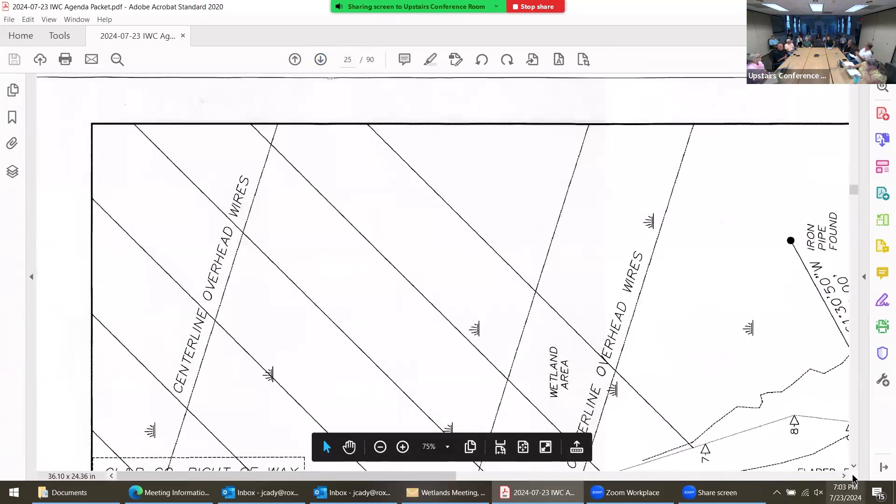All right. If you remember the last meeting, we had some questions for the engineer. Chris suggested moving the driveway in front of the septic, and I notice on this new drawing that the proposed driveway has been moved, so it's not so steep, and water doesn't go screaming down it right into the wetlands, which is, as I said before, a very large swamp up by the high school.

Okay, yeah, we moved the driveway and we also put wood chips in the front to stabilize that hillside for construction, if you see along the front. We moved the pool back 50 feet. And we also put a gallery, a 24-inch gallery, for the backwash of the pool. And I think that was really your concerns at that point. So we just kind of changed a little bit and did change what your concerns were.

Okay. Anybody have any questions, concerns? You moved the pool back, but how about the pool equipment? Yep, it's behind it. If you look, there's a little square, that's where the pool equipment will be.

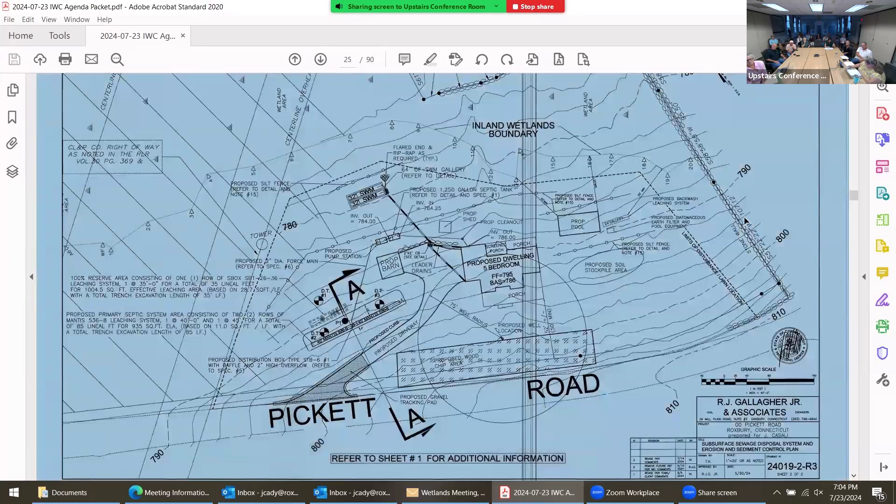And what's the grade on the driveway now? From what to what with the improvement, if you did change it? Which one? Right here, so it goes from 810 to 7. So it goes back to... Sorry, I don't really know right off the top of my head. I'm sorry about that. Well, that's okay.

I mean, it looks like it's an 8 foot, by counting contours, 8 feet of drop, probably 150 feet of run. Should look at that, sorry. That's like a 6% grade, if that's what it is. It's a lot better than it was. It was, I did. All right, any other?

No, John? I'm good. Kathy? Not for me. Sue? No, I'm good. So I'll look for a motion. I'll move to approve this as a regulated activity. Second. Any discussion? All in favor? Aye. Aye.

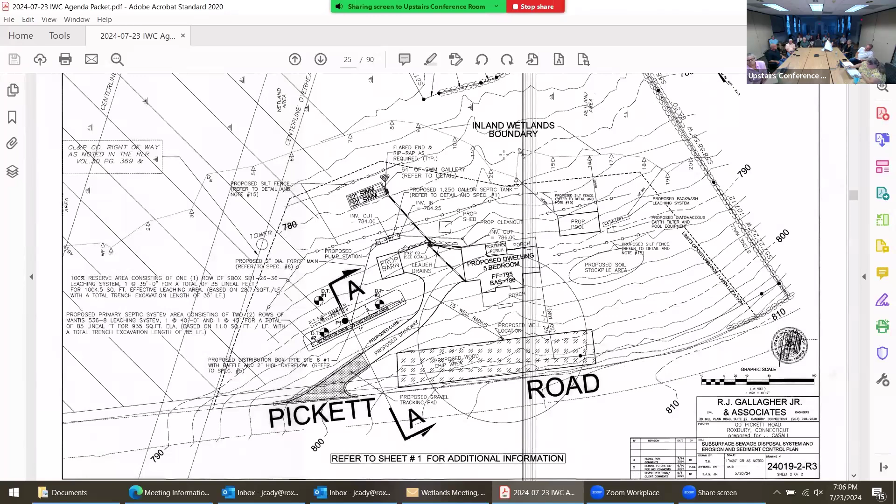Thank you, Heather. Thank you. Thanks for listening to our input. Thank you so much, I appreciate it. Thank you. Have a good night.

124 Weller's Bridge. Okay, we did some site walks here. We have a new map.

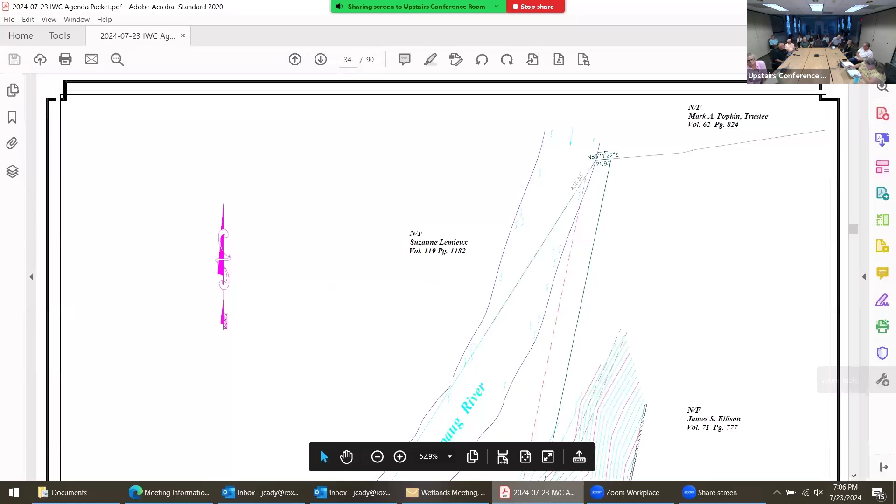Hi, Brian. Russ, how are you? Good, good. The house going okay? So far, so good. Good.

Yeah, that's the survey map right there of the entire property. Do you want to state your name for the record? I'm Brian Neff, licensed engineer. So I drew up the septic system plan, which is the other plan that's included, I believe. Here we go. I brought some paper copies also, if that's any easier to read. Yeah, sometimes it is. A little tiring squinting at the screen sometimes.

Okay, Kathy did the site walk with John. I did the site walk with Chris. Unfortunately, Chris told me after the site walk he wasn't going to be here, so I asked him to send Julie his observations. You want to read that, Julie? Yep, I can read it out loud.

So on 124 Weller's Bridge Road, his observations were: after visiting the property, his primary concern is the potential for erosion and runoff at the site once the stumps are pulled and the excavation begins. Because of its location, proximity to the river, and extreme slope, I cannot stress enough the importance of having multiple layers of protection, and that they be monitored and reinforced regularly. The one saving grace is the natural table point downslope where the energy and sediments could be captured. So if that information could be provided with calculations, he would appreciate it.

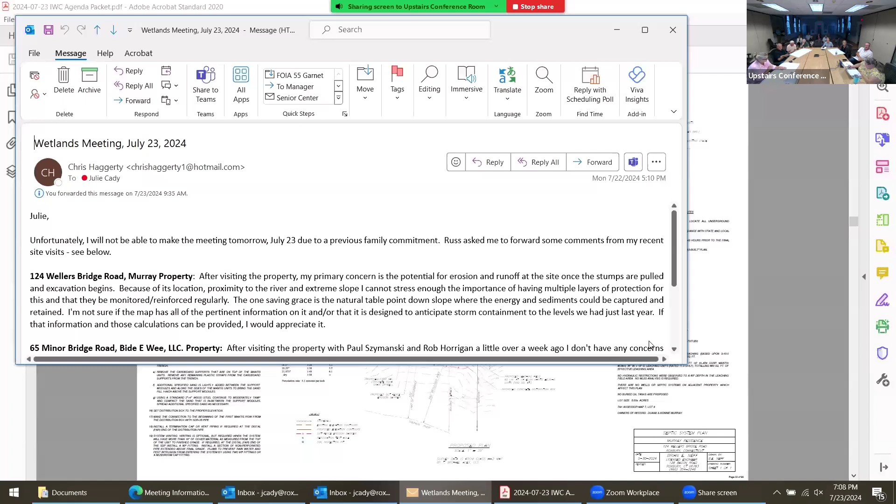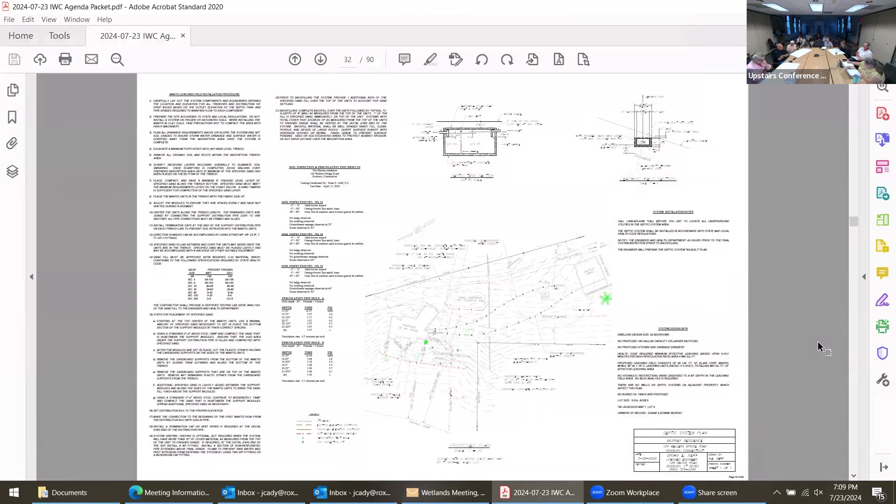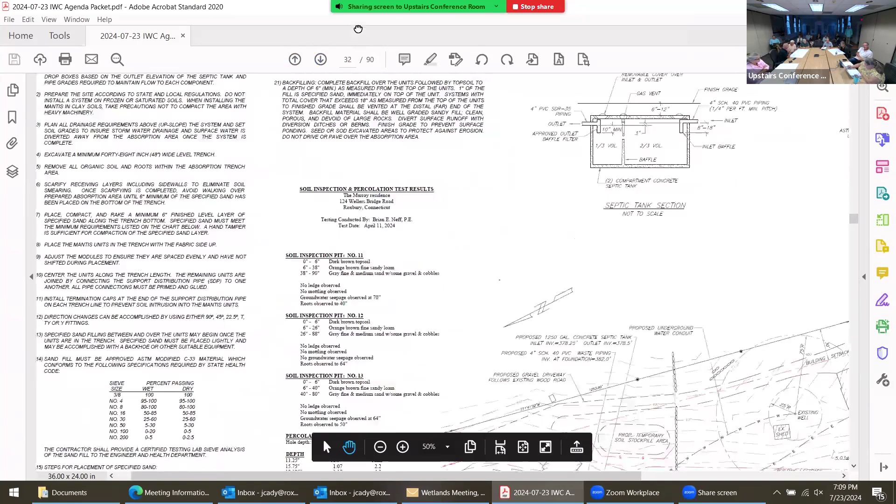So in general, to go over the house site itself, the floor perimeter is a little over 2,000 square feet. It's a 2-story house, so it's relatively compact on the site. I've got some silt fence shown down below the house site and septic area, where it kind of flattens out at the lower level, so that reduces the velocity of water coming down the hill. The actual disturbance area is probably in the range of 5,000 square feet. You've got some perimeter around the house, but it's a fairly small yard area on the sides and down below.

We do have an infiltration dry well down below the house for roof drainage. The soils there are very good. We had percolation rates of 6 minutes per inch for both the primary and reserve septic areas. It's a lot of sand and gravel, so we have excellent drainage in terms of subsurface conditions. And you can see the roof drain pipes going down into that dry well, which is in the lesser slope area below the house.

We've got a 100-foot limited disturbance that's just below the silt fence line, so there's minimum disturbance within that 100 feet. We just basically have the silt fence going in there. The septic system's off to the side, which is a gravity flow system. So the owners have made an effort to keep this as compact as possible, and that limits the disturbance area overall.

On my site walk, I have concerns about the drainage on the driveway, that there's none shown. I did see erosion where water's, even though it's a flat driveway, I saw water heading down the hill. Or some water that comes from the hill above goes across the driveway. Right. So there is some sheet flow. Is the driveway installed? It's an old wood road. Yeah, it's gravelled, but it's not really finished. So it's been used to just bring equipment in the back and things like that over the years.

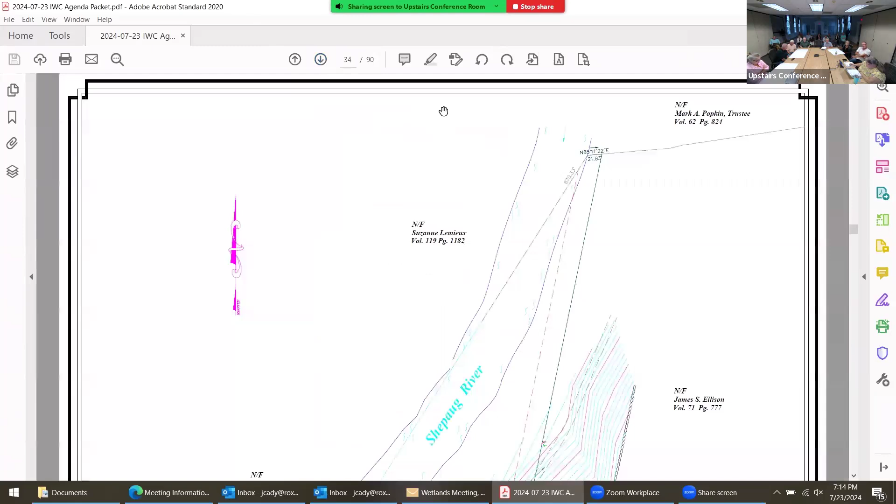Any questions? Is that the only alternative, like the road? Well, it's kind of an odd looking shaped lot. It's a little bit wider at the roadway, it narrows up in here, then this widens out some more as you go toward the back. There's a survey map that actually shows the entire site, because we were looking at it on site. So it's kind of a triangular shape for some parts of it. So you can see it's kind of an unusual shape. The area where the house is proposed is probably the widest area available. If you go closer to the road, it narrows down pretty significantly. If you go further back, it also narrows down because of the shape. It's kind of an odd shaped lot.

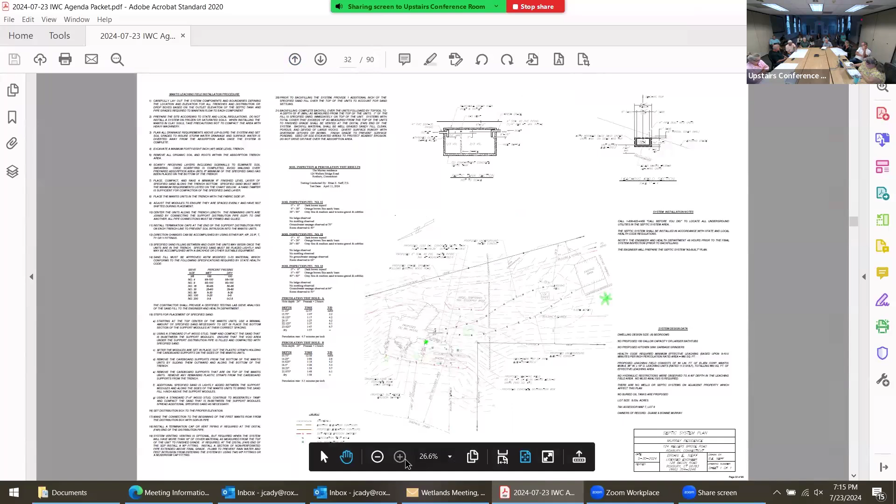The dry well, for what year storm is it designed? It's designed for a 100-year storm, 8.25 inches in 24 hours. Okay. We had very good percs down there, and no doubt that we've got excellent drainage for runoff.

The problem that happens with infiltrators and dry wells is they're designed for a certain year storm, but then the roof drainage can't handle it. The gutters don't contain the water to get it into the infiltration system or the dry well. Well, depending on the storm, I've had a few go over my gutters at my house too. So sometimes there's a very high intensity, which we've had in the last year, I think, quite a few storms that came down in buckets, it seemed like.

Can it be bigger? Well, I mean, you could put bigger gutters on the house. That's certainly a possibility. It always seems silly to me to design a system that'll handle a 100-year storm, but then the roof gutters won't handle a 100-year storm. Right. So it flows over the roof gutters. Right, it's not making its way into the dry well or the infiltration system.

I think a lot of that also comes down to keeping the gutters clean. I had mine overflow the other day. I had to climb up on the roof and clean the gutters out. So it's kind of a maintenance thing also in terms of the overflow. They make a couple of different size gutters. The normal ones are not very wide. They do make an oversized gutter. It's certainly a possibility to put it on here. It's not a big deal to put one size bigger gutter on the house.

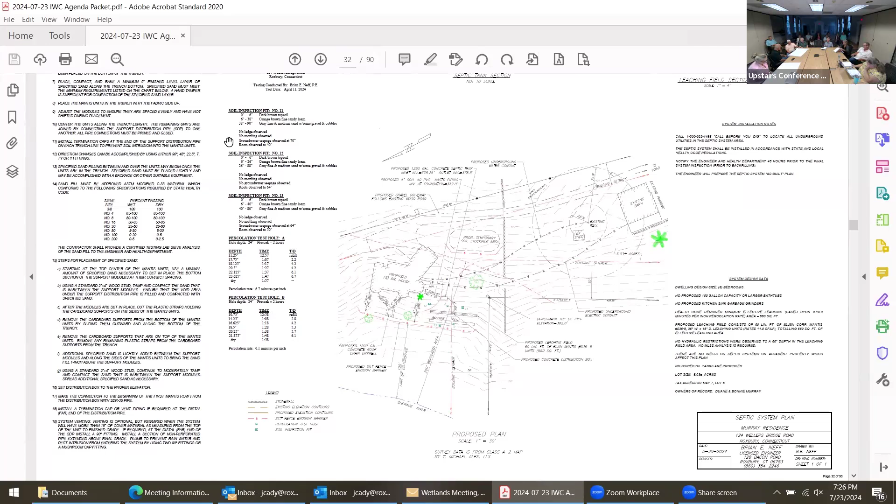Yeah, we could require a fence, a wall, or some natural plantings, so it's not a grassed area where water would want to go right down the hill. At least if it's vegetated, it's gonna break up some of that flow. You could talk to your clients and see what kind of barrier they'd be comfortable with. Yeah, the vegetated kind of barrier. Okay, are we good? Yeah. So we have to call a public hearing. I need my calendar for that.

Now, do we want to do this? Just give you a call, or Lori's here to take a look at it? Yeah, good. So they're around. Sue, I'll walk it with you because I didn't walk it either. Okay, all right, thank you.

The meeting is August 27th. Do we want to do it on the date of the meeting or do we want to have a separate date? I think we could do it on the same. Yeah, I don't think it's gonna be a big turnout. Okay, that would be August 27th. So we will set the public hearing at, you want to do 6:30? Yeah. So we'll do the public hearing at 6:30 and the regular meeting at 7 o'clock.

And this will be on the regular agenda too. Okay. So if we want to discuss it, it's on the agenda. And you'll make sure to get the public notices and all that happy stuff, okay? All right, thank you, Brian. Okay, thank you. Thanks, Brian.

Okay, we're going to Bide A Wee. Minor Bridge Road, 65 Minor Bridge Road. Okay, this is Minor Bridge Road. Jim? Oh, Paul, okay, I didn't know if you wanted to, if you need to speak, let me know.

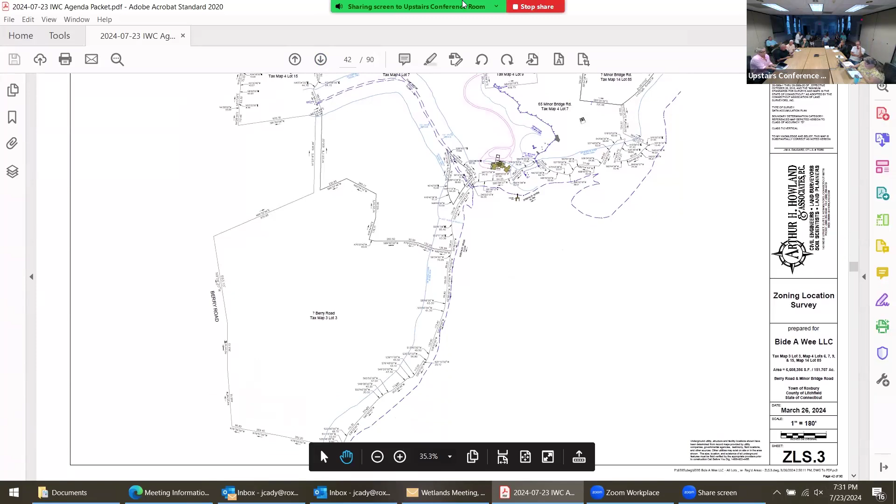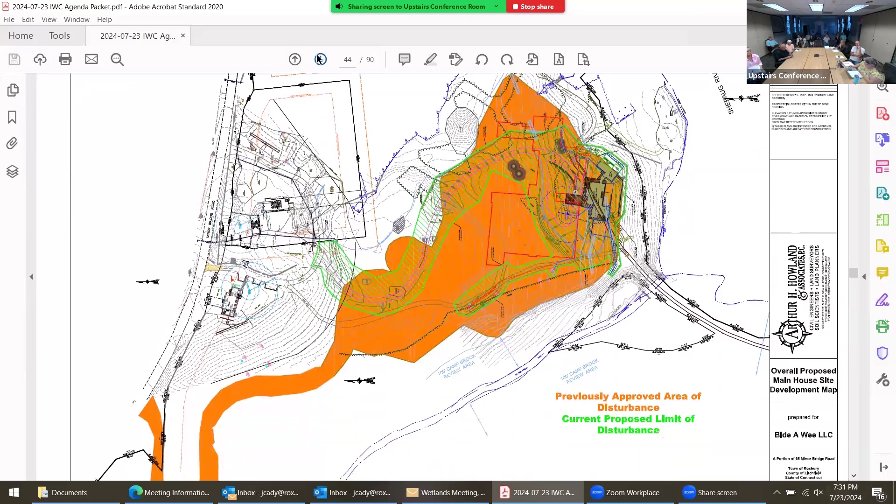Go down, Joel. One more down. Yeah, that one's fine. Oh, go one maybe, is that where? SD3, there we go. Yeah, you can go there. All right. So I'll just point on here.

So the area that I was discussing was this upper plateau area that's relatively flat. The steep area that I was discussing is the area I'm pointing to, which is the central portion of the map. In that area, there's a little bit of cut and fill, just a cut on the upgradient area of that little slope and fill on the downhill side, just to make the driveway approximately 10%. And then as we go down, we're within a couple feet of the existing contour, or in the area where I'm pointing next to the topsoil stockpile, we're actually relatively on grade.

As we approach down, going down the hill where the driveway splits off into two directions, again, it's relatively on grade. In the area between the two driveways, there's a grass-lined swale. This discharges to a 1,200 gallon dry well, which is adjacent to the porte cochere. So basically the upgradient portion of the driveway in this area has overland flow over a meadow area, which then goes into a grass-lined swale, which then goes into the dry well. The portion of the driveway on the east side of the grass-lined swale has been regraded. Previously, it was sheet flowing to the downgradient side or the east.

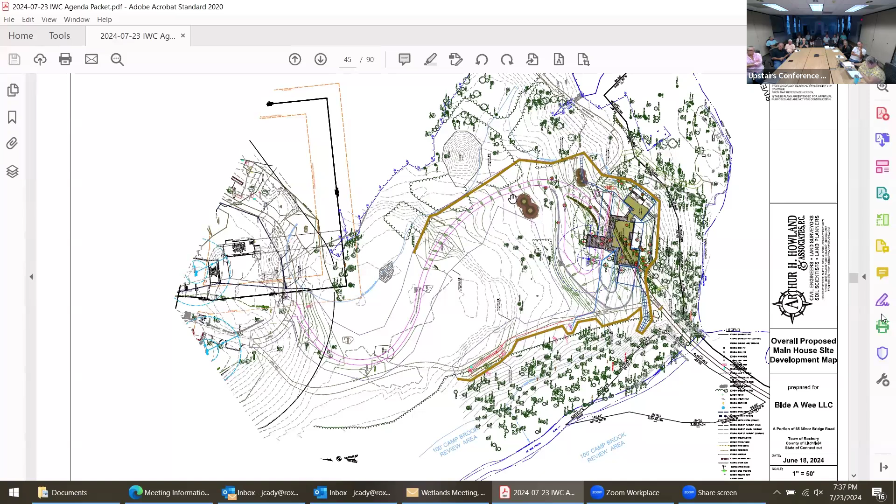On the west side of the development area, we're showing. Here, you can put that up here, Paul. That way. Thank you. On the west side of the development area, we have two little galleries, which is for a potential water treatment system. I'm not sure it's needed because we haven't dug a well, so we don't know if there's hard water. But if there is a water softener that's used, we've accommodated within our design for that.

The leaching fields for the septic itself are also located along an old wood road that soils testing was performed on. That's in the same location as previous. We changed the grading from the original application that was back in the late winter. Previously, the house was all on one level, and then they had decks at the rear. That's now been changed to be a walkout basement in the rear to better work with the topography. What that allowed us to do was to get our limit of disturbance further away from the Shepaug and save a bunch of trees in that area as well.

The drainage system that's located in the southwest corner of the house handles not only the western portion of the driveway, northwestern portion of the driveway. It also handles the west portion of the house and the south central portion of the house as well. As we work around, basically off the southwest corner of the garage, we're proposing a 30-inch high retaining wall. This just acts as a permanent barrier between what I would call the actual living area of this developed area versus downgradient of the wall, which would not be touched and would just be kept in a heavily vegetated state as it is today.

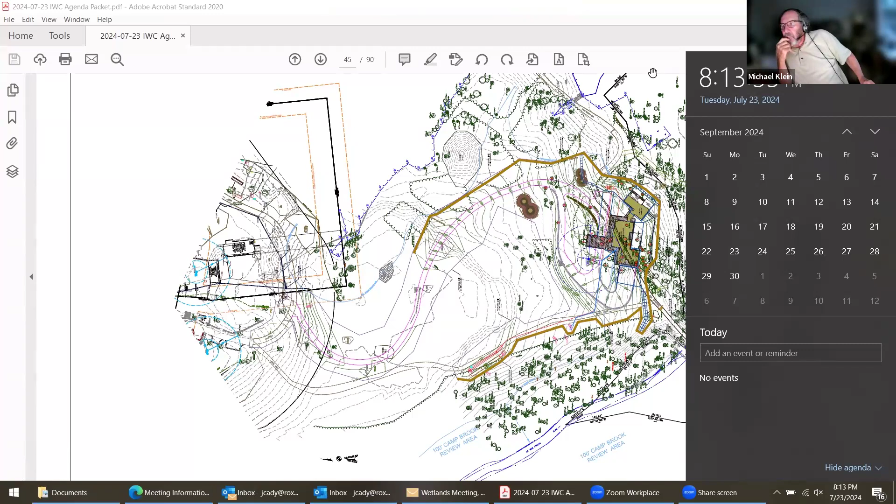Can you move your anniversary? Well, you could watch the meeting online after. Yeah, I can. Okay, as long as you watch it after and before you do any voting. That's fine. Mr. Chairman, if you need me there in person, the 10th of September is probably not going to work for me. I could probably attend remotely. Did you get that, Russ? I didn't hear him. Michael can't make it in person on the tenth. He could probably do remotely. Correct. For the public hearing, should things be ironed out? Are all of your public hearings on Tuesday? Yeah, they're gonna be live and we're gonna have to set them up.

And what was wrong with the third? You said you didn't have to go. No, I don't. Julie's at the selectmen's meeting as well, I think she said. That's why. She has to. That's all right. We outnumber them. What was wrong with August? I think there was a request for more time. Yeah, because our regular meeting is the 27th, so that doesn't give a whole lot of time, right? We'd be sending the plans tomorrow. That will give the consultants 4 weeks to get something back to us on the 20th, and then we'd be here on the 27th ready to go. I'll just have to dial in because I'm out of state.

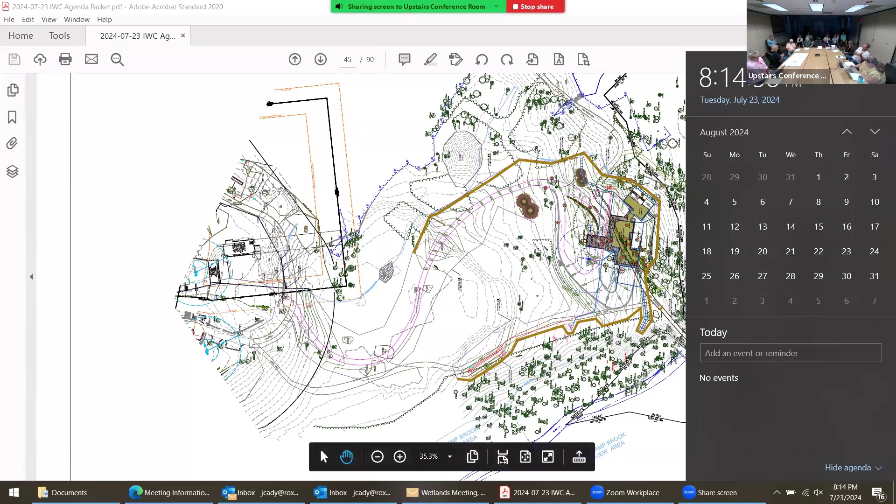How about later that week in August? So we have 2 meetings that week? I could do the Thursday, the 29th. No, I'm sorry, I don't want to rush you. How about the fifth? That's a Thursday. Planning meeting is that night. They have this room. So the tenth, other than Kathy and Michael being remote, that was the only problem with the tenth. So I say, let's go for it. And that works for you, Kathy? The 10th is better, I'll make that work.

Jim's saying you should do the 27th. I was just thinking then we can have some back and forth and get it somewhat settled before the public hearing. I'm good with the 10th. You good with the 10th? Yes. Or the 29th of August is open. Wait, I'm confused, because I thought we're planning the public hearing, correct? Yes. So I'm just saying, if Steve and Michael get us reports ahead of time, it gives me the opportunity to review, respond, and then maybe they have the chance to review my responses. Okay, if we go out more, we're gonna probably have to get an extension, which the applicants would grant us. Yeah, of course.

We've got a few days more than we have available. The other option is you can have your public hearing with your regular meeting, because we'd be the only public hearing then. No, we already have one, Brian's. Okay, so we wouldn't be discussed at the next regular meeting. We'd wait for our public hearing. We could discuss, yeah, if we're on the agenda.

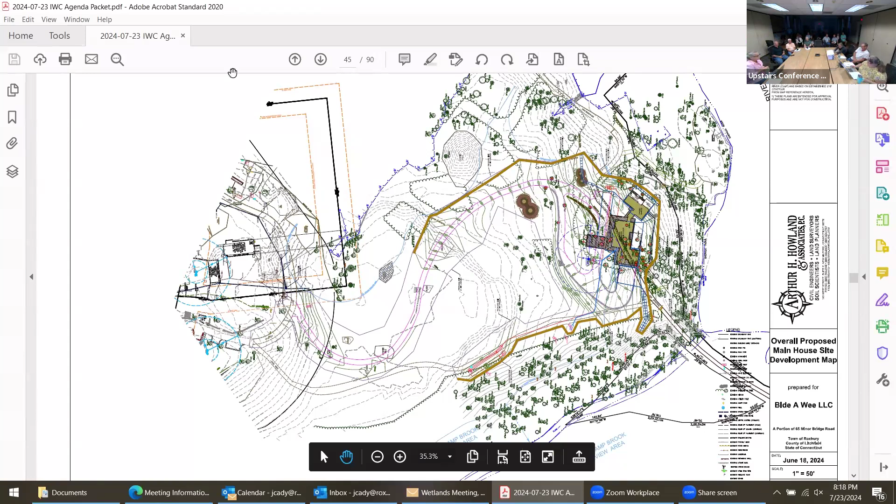Can I have one of those reports? No, I have the map. I need the report. Anybody else? I could send them. Anybody need a plan? Kathy? No, I'm good. We have a digital copy of this, don't we? Not yet, you don't. Well, as long as Steve has it.

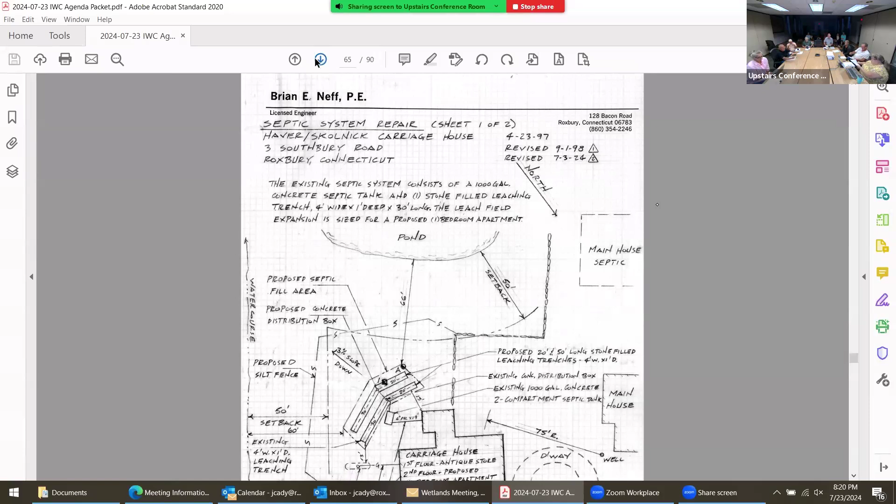Brian, 3 Southbury Road. I know it well. It's right in the corner. Good to see you again, Brian. You went away for a couple of years. Trying to retire, but it's a long road. So I've got some copies of the little plan. So we're under new business. I did this plan probably almost 20 years ago. You got a paper copy of the agenda? I have this one you can use. Thank you.

So this is number 3 Southbury Road, right in the corner of Southbury Road and Church Street. There's a carriage house that goes along with the main house, where they've had their architecture business and also sold antiques. I did a plan back in 1998 for a septic. They were thinking about putting a 2-bedroom house in the carriage house, then decided to devote the whole building to their business and the antiques. So a tank and 20 or 30 feet of leaching field was put in, a good 20 years ago.

They'd like to have the second floor turned into a 1-bedroom apartment. They still have the antique stuff on the first floor, but they've got a lot of room on the second floor. So I upsized the septic. The tank was plenty big enough to begin with, and basically I just added some trenches to make the system bigger. I've highlighted those on the little paper copy.

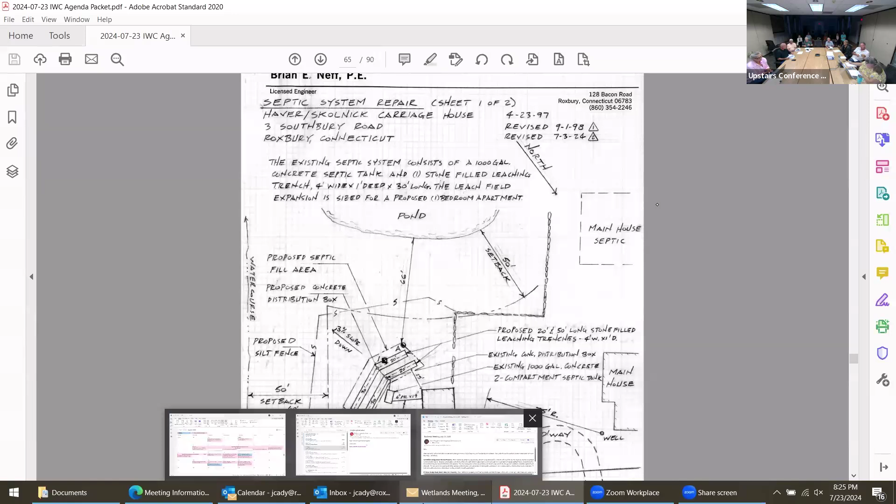Next is Leanne Richards, 11 Holmes Road, removal and replacement of accessory building for home gym. Good evening. For the record, I'm Mr. Houses, licensed professional engineer with Stewart Summers Company. Here on behalf of the Richards for the proposed application that we have submitted.

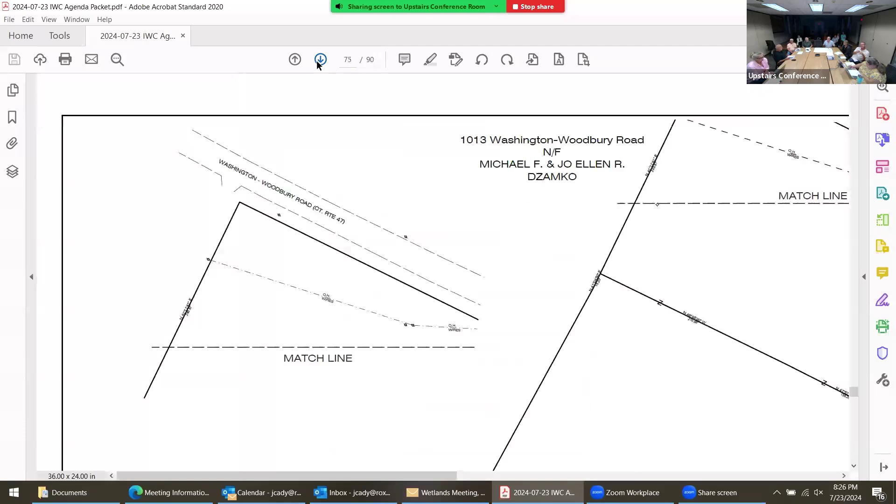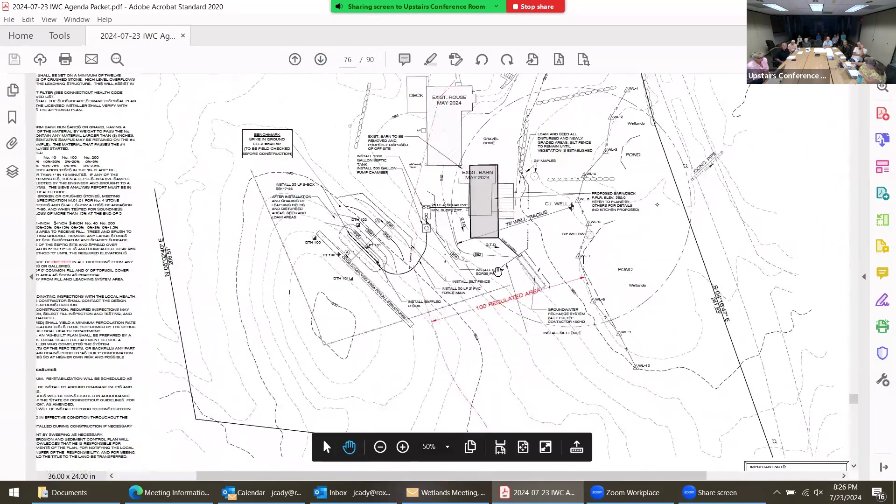For the property, we have 3 sets of drawings. The first sheet is pretty much the overall sheet. The second sheet really pertains to what the application is for. We're proposing, there's an existing structure on the property, with a proposed barn replacing the existing barn to the south side of the existing house. There's 2 houses on the property, but there's an existing barn to the south side of the lower south house. That is in very poor condition at the current time. It's kind of collapsing on itself.

They want to take that barn down and build a new structure for a home gym with a bath; there's no kitchen proposed for this structure. It would occupy that part of the original old barn and expand it further south. And then a deck on the east side towards the wetland area, which has been flagged. There's an existing well in very close proximity to the wetland boundary as noted on the map. The septic fields are outside the 100-foot regulated area. The tank and the pump chamber, because we're pumping up, are within the 100-foot regulated area. We are also providing groundwater recharge through the roof runoff from the structure so that they don't cause any detriment and effect downgradient.

How far is that from that pond? I don't remember off the top of my head. This scale, you remember this? This is a pond they dredged. Oh, okay, yeah. They dredged the pond lately? Not aware of that. Maybe it's the next house. It's the same one. We're gonna do that after Labor Day, when all the red-winged blackbirds are out. The structure itself to the pond is about 55 feet, more or less. To the deck itself is about the same, 50 to 55 feet.

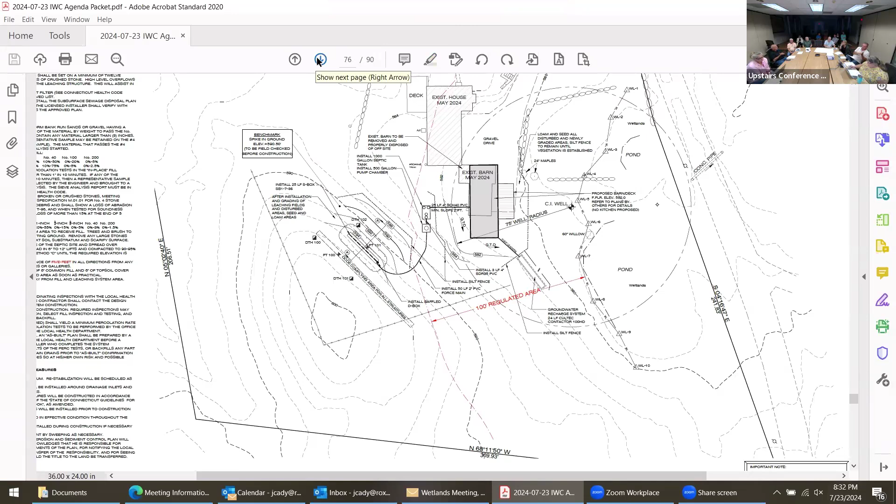Next, like they do every year, notification of treatment of Yielding Pond, this is with herbicide. Yielding Pond is on Schoolhouse, I think. So that's just a notification. Rob and I have talked about this before, we couldn't require a permit. But it's a state permit.

What are they treating it with? It's called Rodeo, but it's really Roundup, but for water. It sticks to the plants. So we've been notified.

We'll move on to wetland enforcement officer's report. John? John Cady for the record. As far as non-regulated permits, there really weren't too many this month. A couple generators and just a deck. It's been rather slow on that aspect of things. I do have two NOVs, one that's gonna go out tomorrow and one that I sent out last week.

This one goes to 1012 Baker Road, Mark Lowe. We had a complaint about encroaching in the buffer zone with supplies and scrap metal and junk like that. Did a site walk and it was confirmed he does have stuff there. So I did talk to Mark. He did get his NOV. He has 30 days to get in compliance with that, remove everything 50 feet outside that buffer zone.